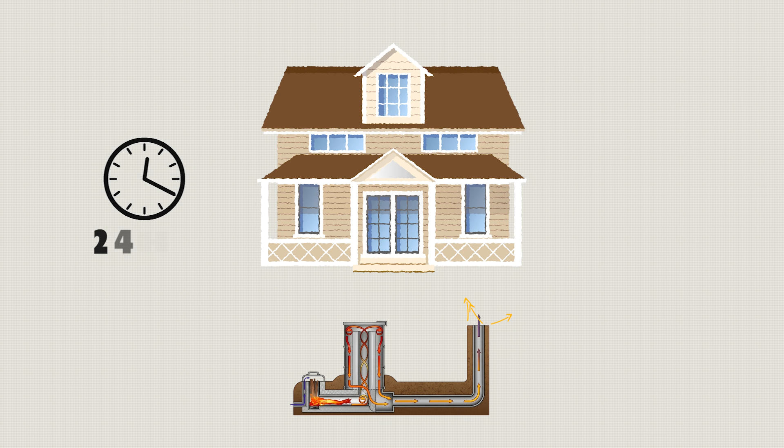This stove may be one of the most efficient heating systems ever created, yet it is illegal to install in most homes across the developed world. This is a rocket mass heater. It burns 90% less wood than a traditional stove, heats a home for up to 24 hours on a single burn, and can be built for less than $500 with materials from your local hardware store.

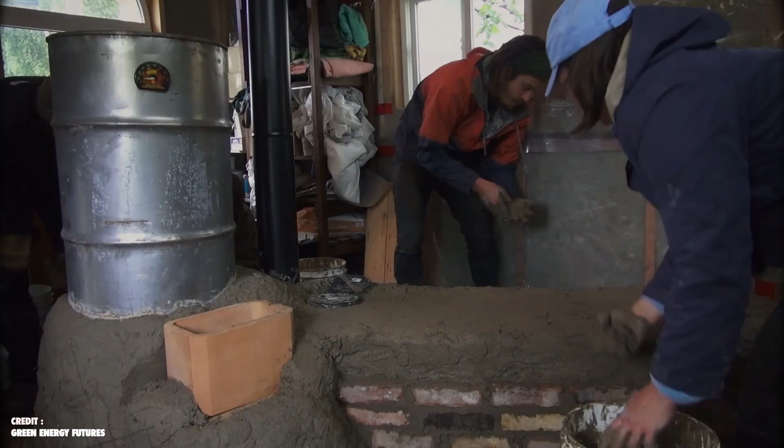Its origins begin in one of the poorest regions of Central America, where it was designed not to save money, but lives. This is the story of the rocket mass heater, how it works, and why building regulations have made it illegal for you to build one.

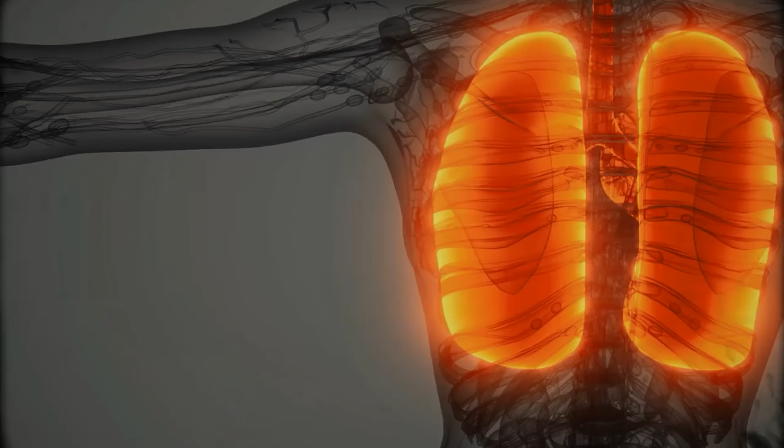In 1973, a Welsh ecologist named Ianto Evans was watching women and children die in Guatemalan kitchens. The cause was not poverty, violence, or disease. It was smoke. Three-stone hearths burning 4 hours a day filled rooms with particulate matter comparable to smoking 40 cigarettes daily. Families breathed in this smoke year after year, causing chronic lung disease to develop invisibly in people with no alternative but to keep using systems that were poisoning them.

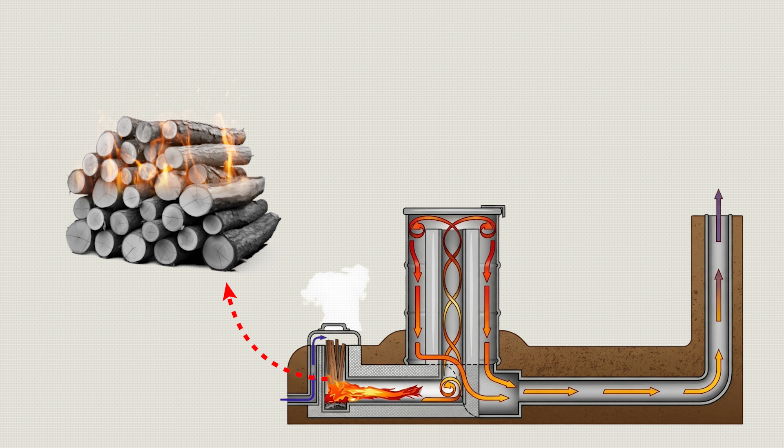According to the World Health Organization, indoor smoke from open fires kills approximately 4 million people annually, most of them women and children. Having witnessed it firsthand, Evans knew this better than most, so working with the Aprovecho Research Center in Oregon, he designed a replacement system. His goal was to create a stove that anyone could build from local materials, that burned wood efficiently enough to produce minimal smoke, and required no external supply chain.

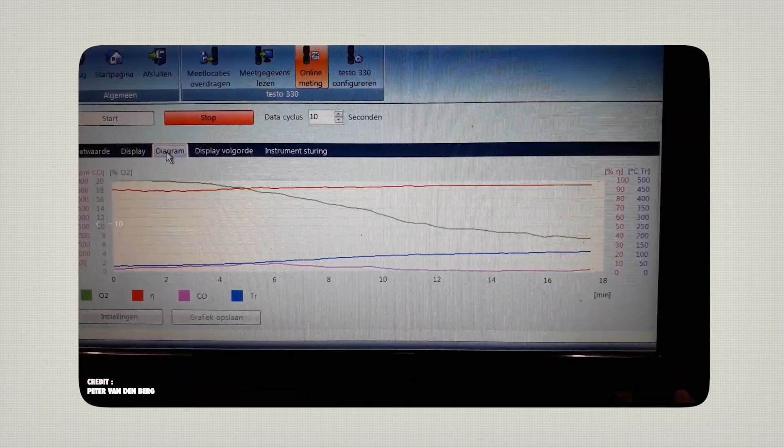And in 1982, the rocket stove was unveiled. It was named for the roaring rush of air through its L-shaped combustion chamber. It burned hotter, cleaner, and on less fuel than anything previously. Later studies found this simple stove design reduced carbon monoxide production in the kitchen by 1/3. It was brilliant, yet Evans noticed a fundamental problem.

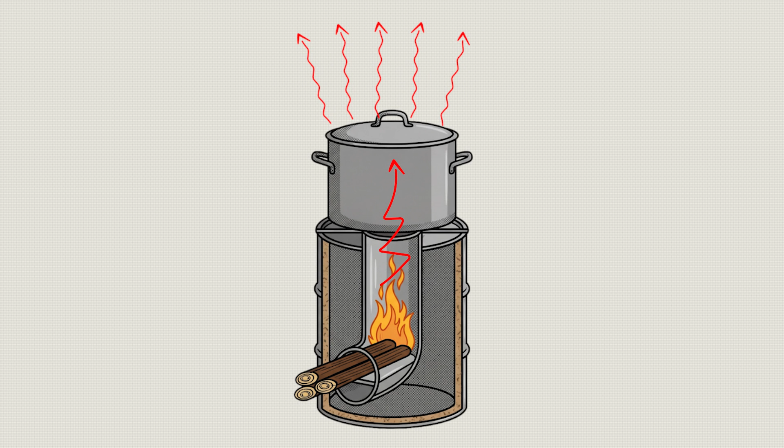When using the rocket stove, there's a significant heat loss. Energy was transferred into the cooking pot, then lost to the air. In the warm climate of Guatemala, this wasn't an issue, but in cooler areas that relied on a stove for heating as well as cooking, this was a big problem. The solution to this dilemma came from Korea.

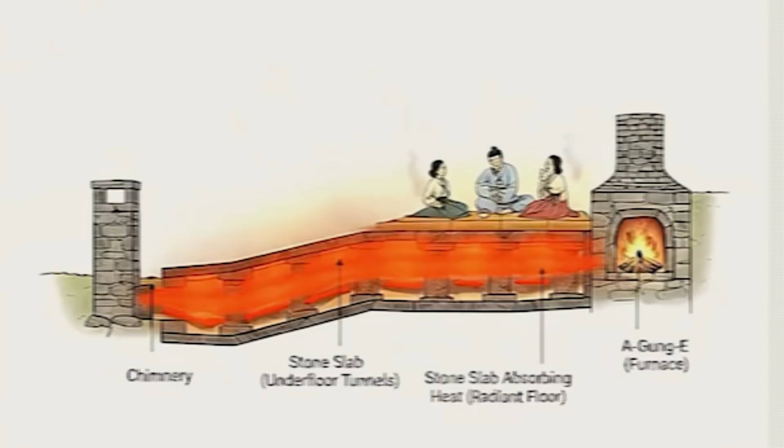For over 3,000 years, Koreans had routed combustion gases from a firebox beneath a stone floor, heating the floor from below and radiating warmth for hours after the fire died, a system known as the ondol. The key lesson from the ondol, as well as other masonry heating systems across the planet, was the efficient use of thermal storage. Materials with the capacity to absorb heat from a short, intense heat source and release it slowly over the following hours.

By the 90s, Evans unveiled the new version of his creation, the rocket mass heater. Combining his high-efficiency combustion stove with the thermal storage capabilities of the ondol, he had devised one of the most efficient home heating systems ever created. To appreciate the brilliance of this system, we need to understand how it works.

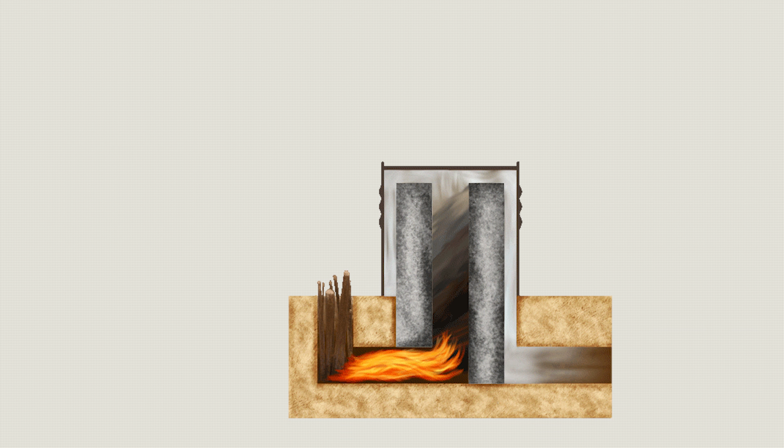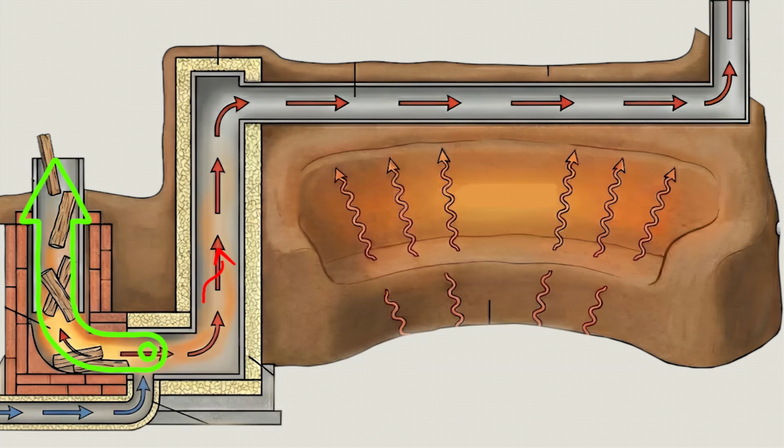It begins with loading wood into an upright feed tube, sticks 1 to 3 inches across, the kind of stuff that falls from trees naturally. Unlike a conventional stove, here, the fire burns sideways. The L-shaped geometry at the base of the feed tube bends the combustion into a horizontal burn tunnel before turning vertical again. Fire then rises into the system's heart, a section called a heat riser.

The heat riser, a thick, heavily insulated chamber, creates temperatures between 1100 and 1650 degrees Fahrenheit. A conventional wood stove, on the other hand, burns at 570 to 930 degrees Fahrenheit. The heat riser traps the flammable gas that the wood releases as its solid matter breaks down. In a traditional system, most of this is lost through a vertical chimney before fully combusting.

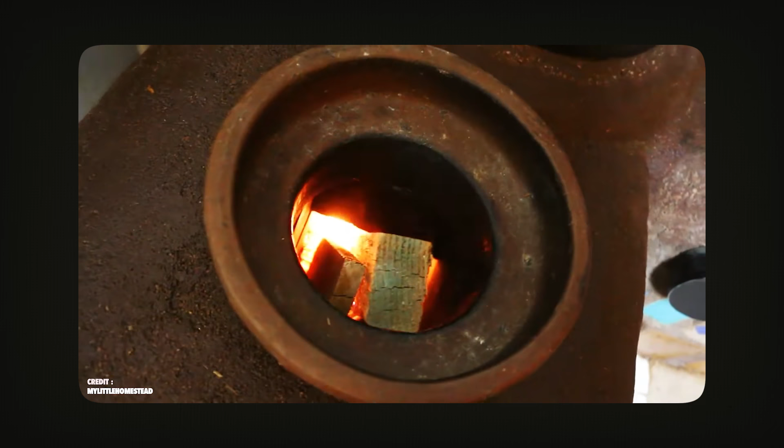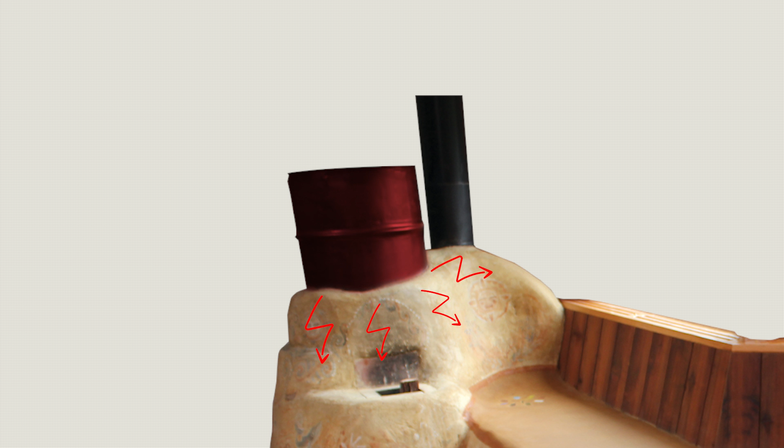The wood gas trapped in the heat riser combusts, creating a second burn and releasing additional heat into the system. This combustion creates a very hot, clean gas, mostly carbon dioxide and water vapor. As this gas begins to leave the heat riser, an inverted steel barrel sits over the riser, forcing the gases back down and around the outside of the column, emitting immediate warmth into the room.

At the drum's base, the hot gas enters an exhaust duct that is embedded in 2 or 3 tons of cob. With its superior thermal properties, the cob absorbs heat from the exhaust pipe, slowly radiating it out to the environment around it for the next 16 to 24 hours.

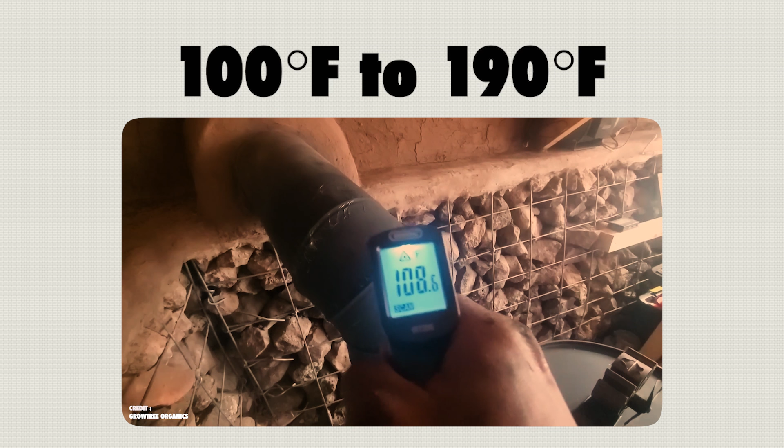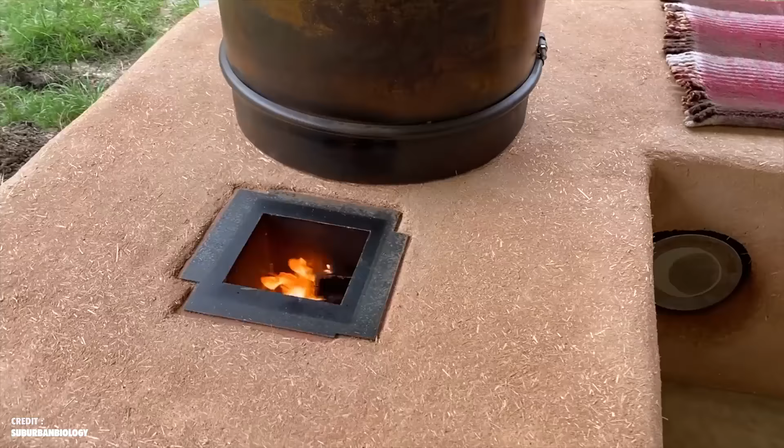By the time gases reach the outdoor chimney, their temperature has dropped to between 100 and 190 degrees Fahrenheit. In comparison, a conventional wood stove exhausts at 750 to 1100 degrees Fahrenheit, and every degree of that difference is heat that has stayed in the building. This system is so efficient that when a Dutch aerospace engineer measured the combustion of a rocket mass heater, it recorded 90.5% thermal efficiency, making it one of the most efficient ways to generate heat from biomass.

For perspective, an open fire has a thermal efficiency of 15%. And that sounds pretty impressive, but I'm willing to bet not many of us are huddling around an open fire as our primary heating system. So, how does it compare to something more relatable?

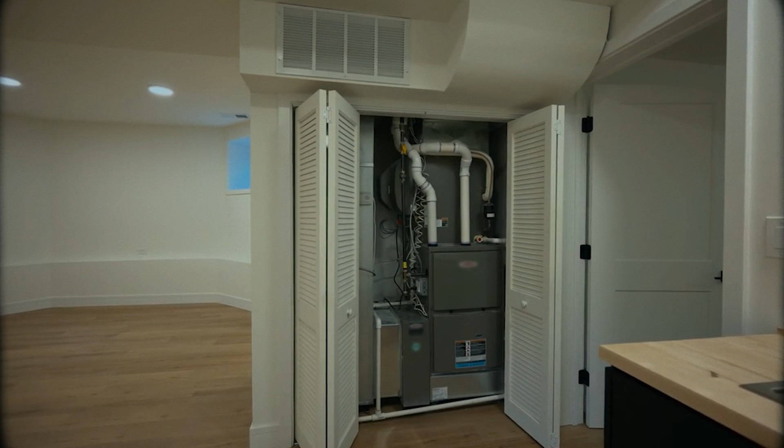A modern high-efficiency gas furnace is rated at 80 to 98% AFUE, which measures how efficiently the system converts fuel to heat. And that might sound competitive, but the difference here is that AFUE measures conversion, not delivery.

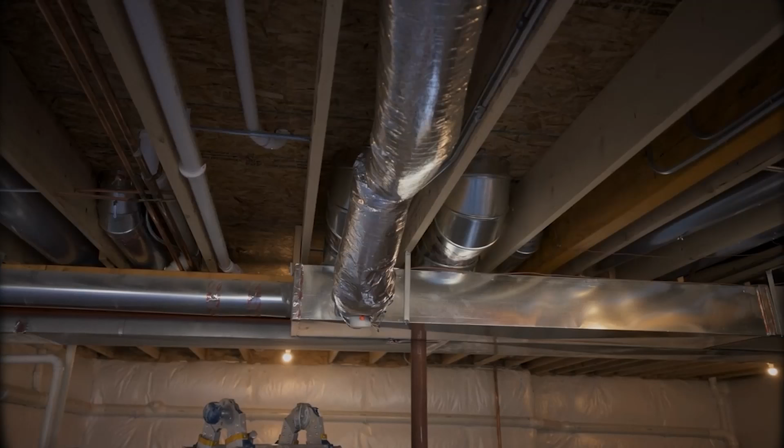The problem with these systems is that gas central heating warms the air, and warm air rises. It pools at the ceiling and escapes every time the door opens. And when the thermostat detects a drop, the furnace fires, and the cycle repeats throughout the day and night. Essentially, you're not heating your house, but the air inside it.

A system that stores its heat in the thermal mass of a 2-ton cob bench is infinitely more efficient on both fuel and cost. And there's plenty of documentary evidence to show the efficiency of the rocket mass heater.

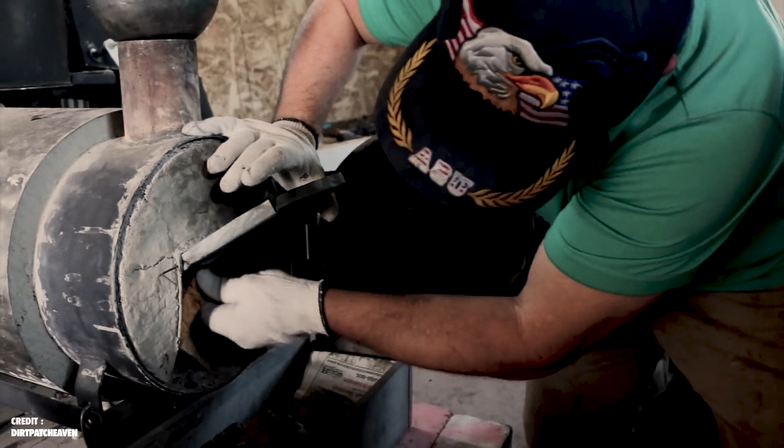A 900-square-foot home in upstate New York recorded a 60% drop in firewood use when it switched from a conventional wood stove. Another documented case in Colorado's San Luis Valley reported a 50% reduction in fuel usage after adopting the rocket mass heater. And the type of fuel that is needed is not much more than sticks. Many users report heating their homes entirely from what accumulates in their garden over the course of a year.

So why, after 50 years of documented performance, is this technology not only absent from the mainstream, but actively prohibited by building regulations in most of the developed world? The simple answer is that building regulations in the United States, the United Kingdom, and across most of Europe prohibit open combustion appliances in residential buildings. And the reason is that, within a closed environment, combustion systems like this have been proven fatal.

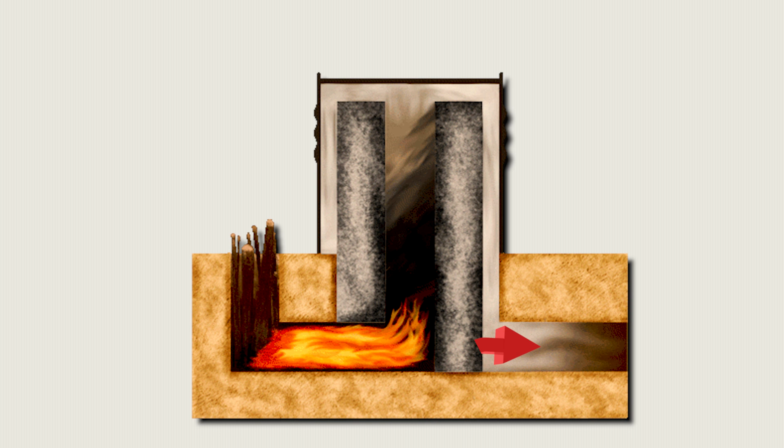Under normal operating conditions, combustion gases travel in one direction, up the riser, through the thermal mass, and out of the building. But a well-insulated modern home with mechanical ventilation, a heat recovery unit, or a kitchen extraction fan can develop negative indoor air pressure. When that happens, airflow can reverse. This can cause colorless, odorless, and poisonous carbon monoxide to be drawn back into the living space without you even realizing it.

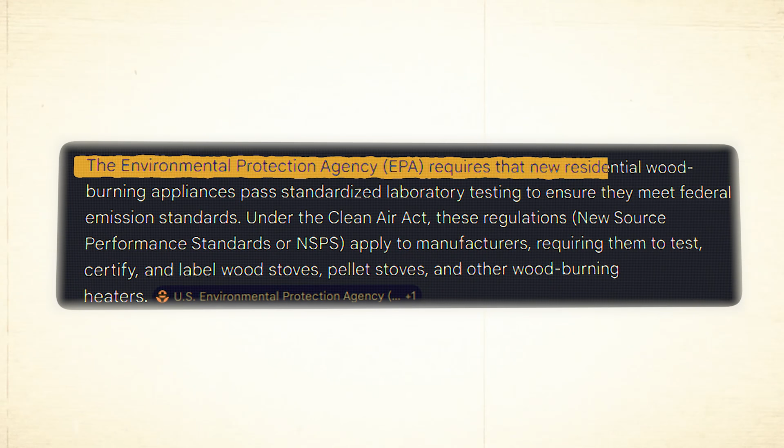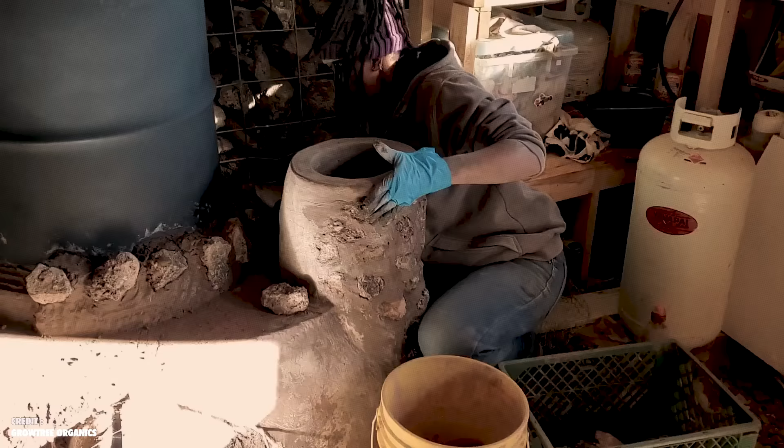The certification framework adds a second barrier to implementing the rocket mass heater. The Environmental Protection Agency requires that any wood-burning appliance pass standardized laboratory testing on identical, mass-produced units. A site-built system constructed from clay, sand, and a salvaged drum has no pathway through a framework designed for manufactured commercial products. So essentially, bureaucracy makes it nearly impossible for you to implement this in much of the developed world.

But those prepared to engage the regulatory process will find more pathways than a decade ago. In Portland, for example, there is now a route for indoor rocket mass heaters. Rural counties across the American West with owner-builder exemptions can also have indoor installations approved where the builder can demonstrate compliance with ventilation and CO detection requirements. But for most of us, regulation dictates that it is illegal to replicate this setup in our homes.

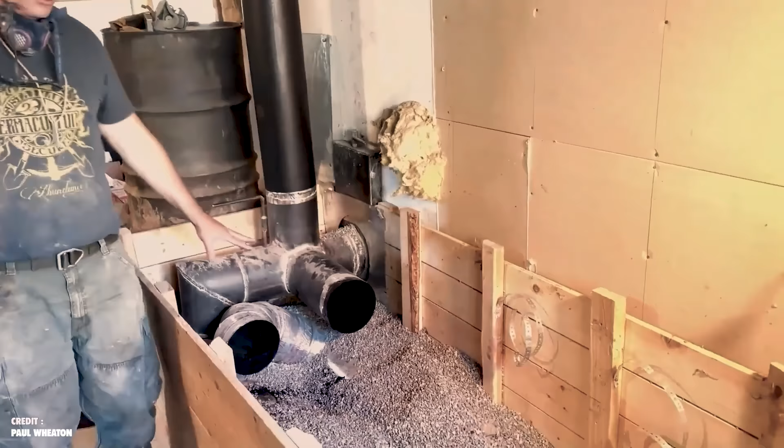In this situation, there are two options available. The most genuinely accessible starting point is a structure that sits outside residential code entirely, like a workshop, a greenhouse, or a barn. These spaces operate under no indoor pressure concerns and teach you the fundamentals of rocket combustion in a context where the cost of a design error is a cold workshop, not a CO event.

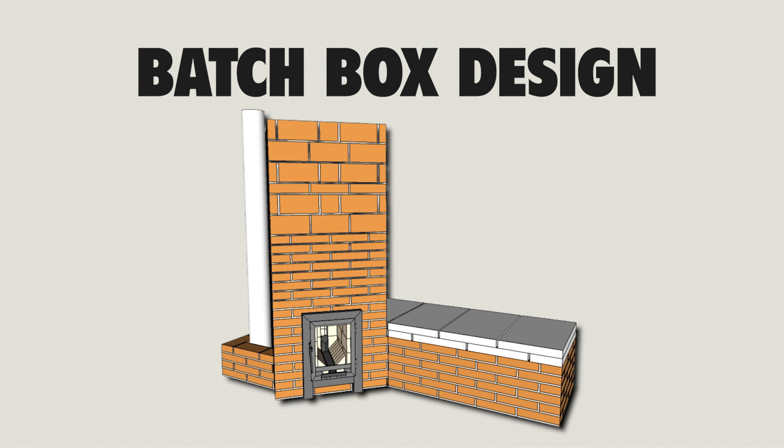If you are looking to implement the efficiency of a mass heater, then batch box design is one of the few that approaches what building regulations exist to enforce. Its sealed firebox door has a dedicated external air intake piped directly from outside, which eliminates the risk of carbon monoxide poisoning by isolating the combustion process from the room's air pressure entirely.

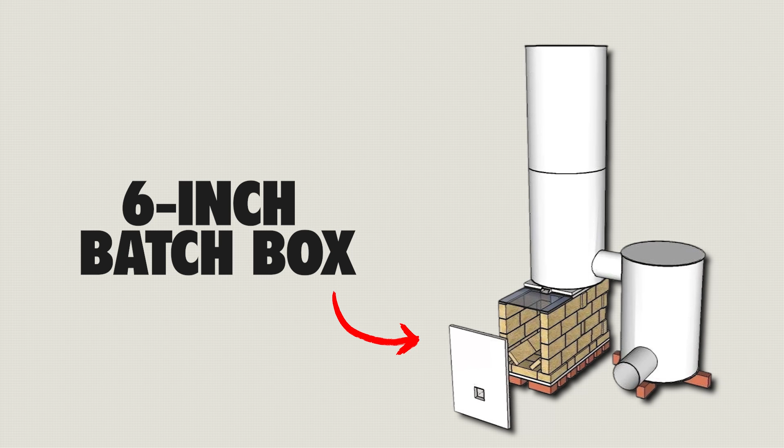A 6-inch batch box system costs between $300 and $700 in materials, operates under no indoor pressure concerns, and teaches you the fundamentals of rocket combustion. Batch box specifications are available free online under a Creative Commons license and constitute the most rigorous technical documentation available on building your own system.

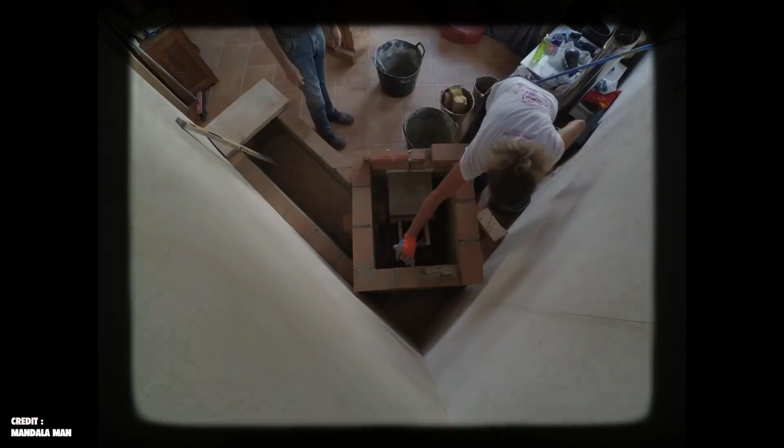The rocket mass heater is a heating system built from 3,000-year-old thermal principles that utilizes the power of 20th century combustion science. While its knowledge is easy to attain and materials are widely available, for most of us, regulations make it impossible to implement. A lot of what this channel covers sits outside the mainstream, not because it stopped working, but because the conventional systems are easier to sell and regulate.